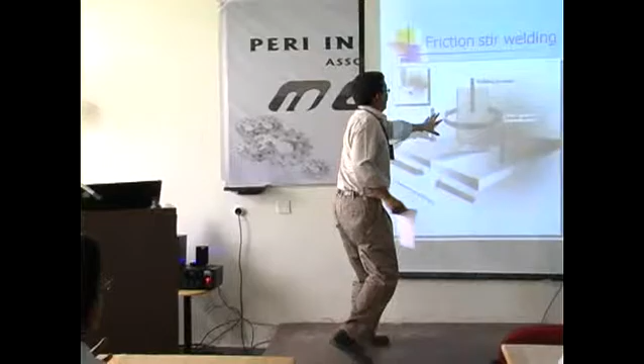Now coming to the next one is the friction stir welding. This is another concept similar to friction welding. So when I say friction stir welding, again this is a solid state process. Now I have two metal pieces. Now what I am going to do is, I have a pin. This one is normally called a pin. These are two metal pieces which I am going to join. Now what I am going to do is, I am going to join these two metal pieces.

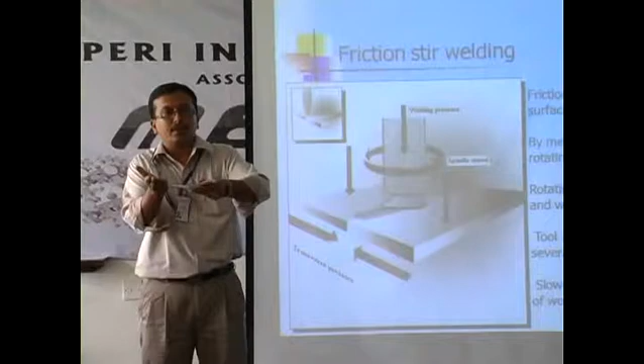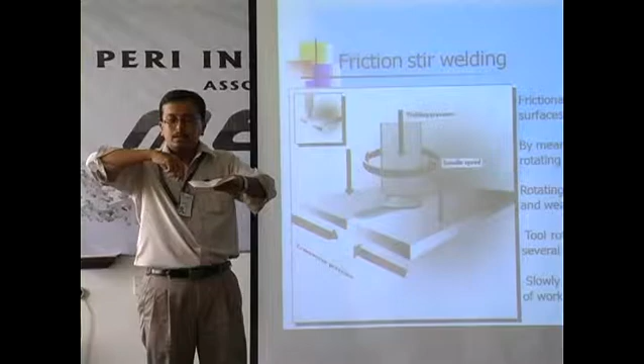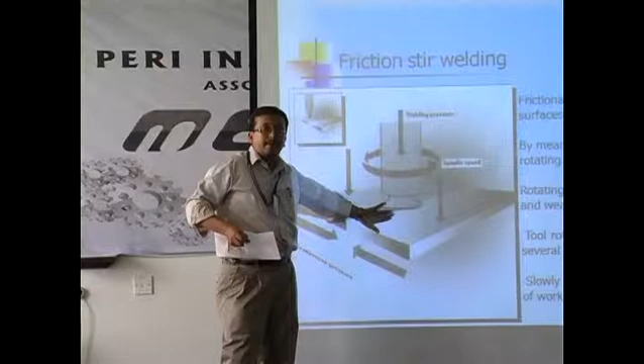Now this pin, the bottom, you can make it different cross sections, a circular cross section or triangular. The pin can be of different cross sections. Now you just insert it, and when you start rubbing, this acts as an electrode as well. Now this rubs the metal, puts the metal in a plastic state. You got what I said? This keeps moving like an electrode. Now, again similar to friction welding, you get the welding to be done.

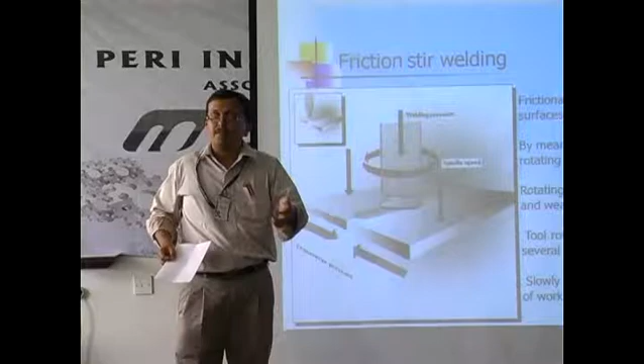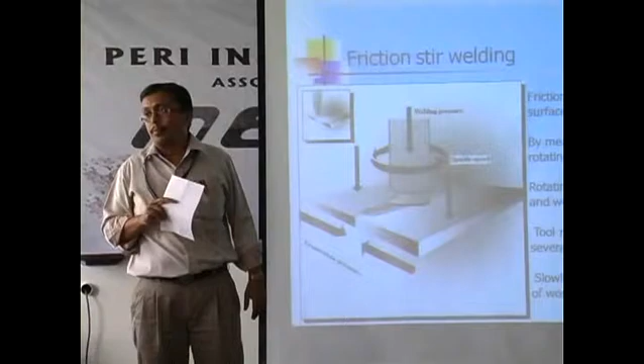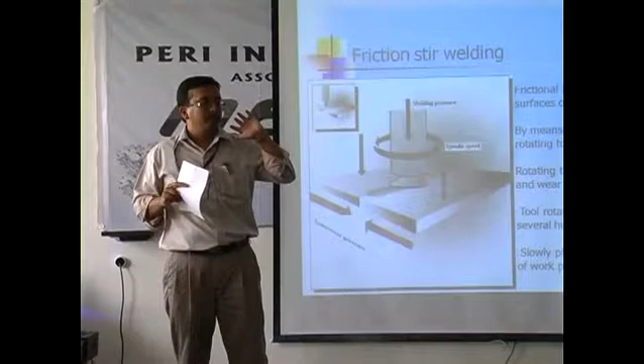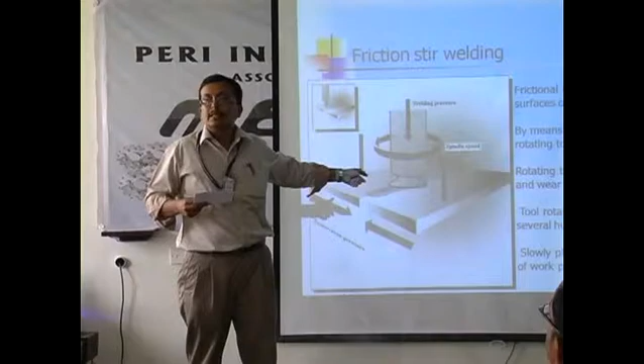But here, one advantage is, friction welding is applicable only for rotary components. Or if you think about linear friction welding, it is applicable for components with thicknesses beyond 20 mm or 25 mm. So below which, if you go for linear friction welding, it is not comfortable to produce that much amount of energy. So this particular process will support you even if the plate thickness is less than 12 mm. You understand? So that is why we go for this particular process.

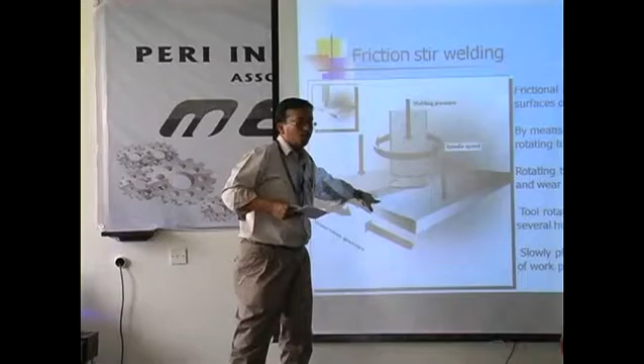Now here the most important thing is the parent metal plates and this pin. This pin plays a vital role. When the cross section is changed, how the weld strength is changing, a lot of work is going on as of now. By changing the cross section, how you can improve, because the strength keeps on varying. If you change the cross section of the pin, the strength of the weld bead keeps on changing. So that is very important here.

So if you look into this one, friction heating, as I have already told, the same friction heating is used. So you have a non-consumable electrode, but the pin plays a vital role. That's stirring. See, the purpose of the pin is, once it creates a plastic state, that metal has to be stirred in such a way that the plastic state metal is uniformly distributed. If you don't stir it, the plastic metal will try to solidify at one end, probably it may not go where welding is required. Now that is the purpose of the pin here.

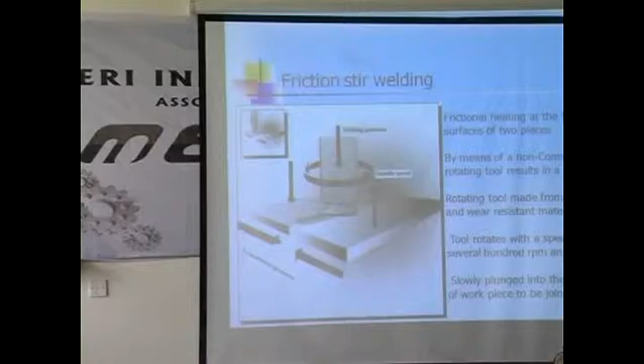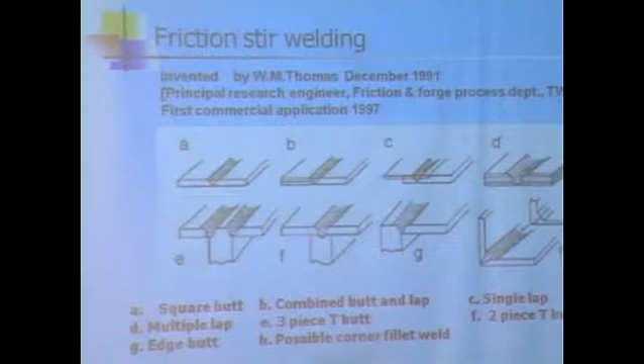Now the rotating tool is made of hard wear resistant metal, mainly made of carbides. The tool rotates with a speed of several hundred RPM, slowly plunging into the joint line of the workpiece to be joined. This is the process here. Now these are different types of joints which can be made. This was mainly invented in 1991, a recent welding process, probably just before you were born.

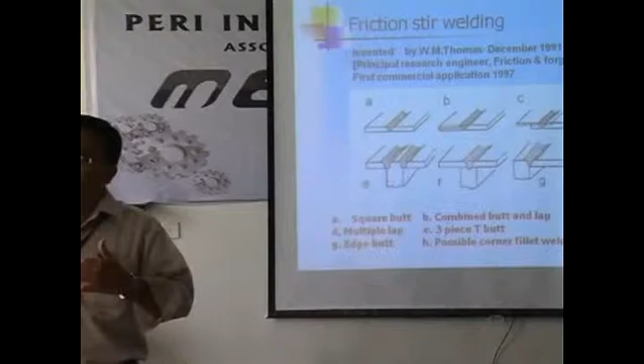Now this process, if you look into the research on friction stir welding, people work only with aluminum alloys. Because if you work with some other metal, it is again useless. Why do you go for aluminum alloys? If you weld aluminium by any other process, it will be followed by a hairline crack.

The friction method alone showed some improved results in welding aluminum alloys. Now that is very important. If you say that nobody has done welding in some other metal and you are going to do it, it's a costly process, and you can do gas welding or arc welding and complete it for some other metal. As far as aluminum is concerned, you can even test it with other electric arc welding processes.

But at the end of the day, you should go for NDT testing and find out what the defect is inside. Just looking with the naked eye, you cannot find the defect, but there are defects. That is proven. If you look into journals, you can see a lot of defects. You cannot weld aluminum at all by any other process. That is what the literature says. You understand? People have worked with aluminum; not possible.

So in aeronautical industries, if you want to join aluminum, they will go only for riveting. But nowadays, they go for the friction welding process. This is again aluminum. It's possible to join aluminium up to 75 millimeters thickness using friction stir welding on both sides. On both sides. Now that is very important. And here we see it viewed by a thermal imaging camera.

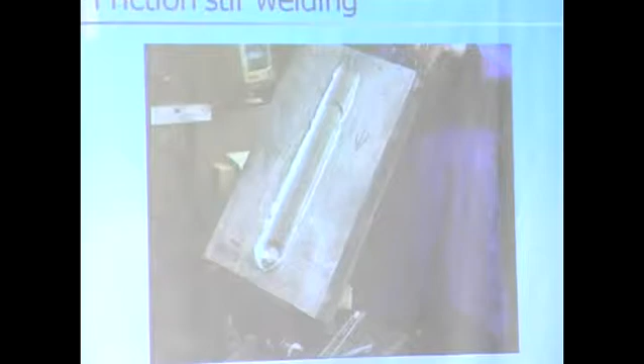Right. Now comes the next one, the latest: ball bonding is a technique for interconnecting silicon. This is the most advanced method. Right now, I cannot go deep into this one. But there are something called micro joining, micro welding processes. In micro joining and micro welding processes, you have a current of 0.5 to 50 amperes in a fusion process, and often a microscope is used to see the joint. That is very important. When I say micro welding or micro joining, you need a microscope to see the joint.

Now there are different types of micro welding processes: micro resistance welding, micro plasma arc welding, ultrasonic welding, low power lasers. These are some of the techniques. Of course, lasers you would have seen, but the remaining ones probably you would not have seen. So let me show you some of the joints which are prepared.